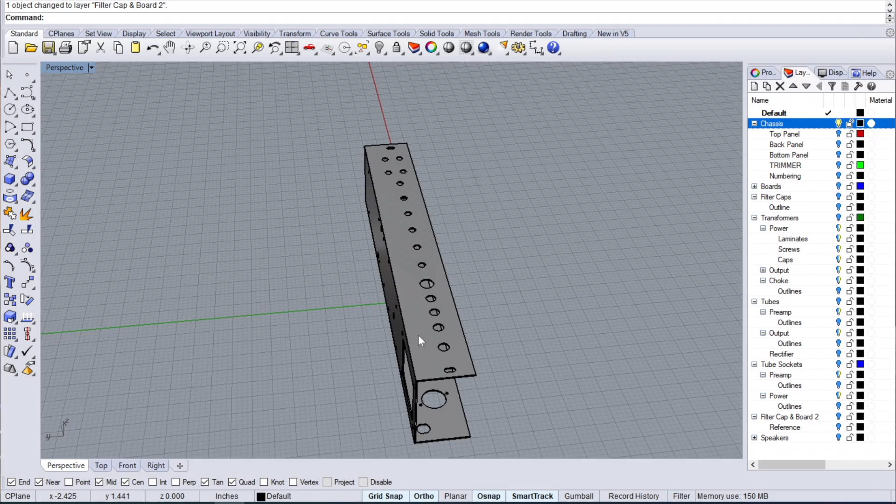I started with the chassis - let's zoom in and take a look. It doesn't have sides on it, but the location of all the holes, fuse holder, inputs, everything, the lamp - that's all accurate. Looking at the back, I've got the opening for the transformer, all the holes, wire holes, mounting holes for the other transformer there. And then all the accurate openings for power cord, rectifier, output tubes, preamp tubes.

Everything is there. I've worked up a little panel with all the numbering two different ways - the traditional way and a reverse way - so that if you're standing at the amplifier and the chassis is in back of the cabinet like it normally is, the numbers would face you. The Blues Juniors at some point finally figured out, hey, let's face the numbers toward the player. That's a good thing - I might try to do that.

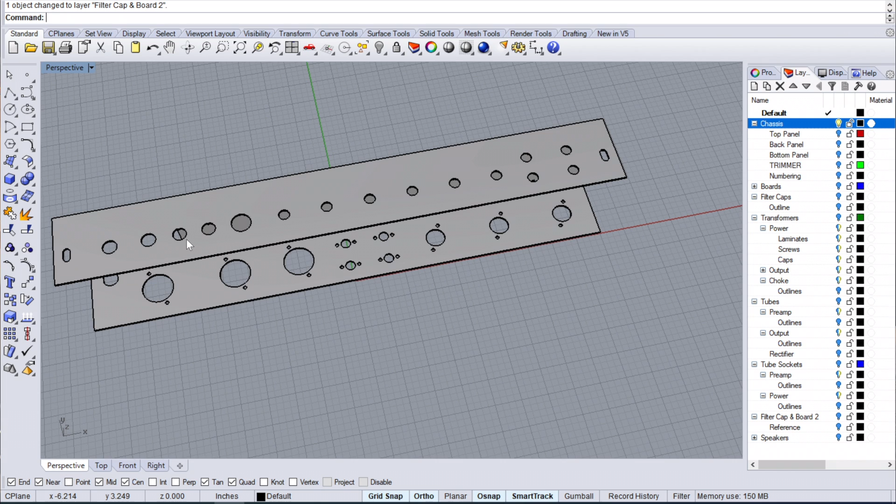I may end up having this chassis in the front of the amp, but in order to do that I had to draw some transformers. So let's take a look at the transformers here.

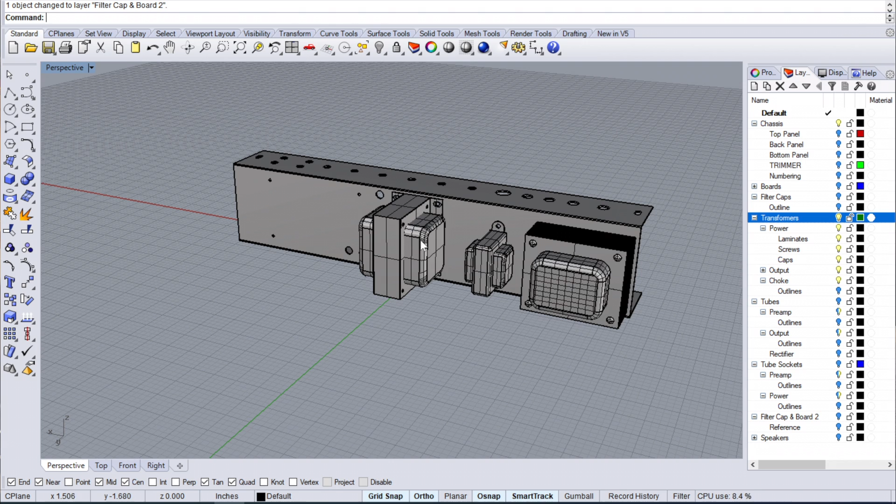So we have on the right side the power transformer, then the choke - I think that's regulating the voltage to the 6L6s, I don't know, it's late - and then the output transformer there.

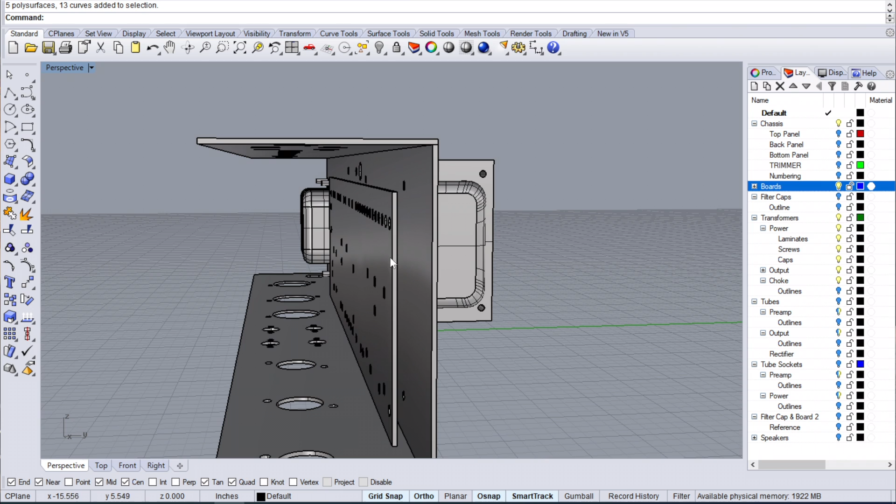I also made it a point to draw the circuit boards - I didn't draw the components on this one, but I'm going to end up having standoffs. I've got to figure out what length of standoff I want. There would also be an insulator board on the underside of this circuit board, so that location can move around.

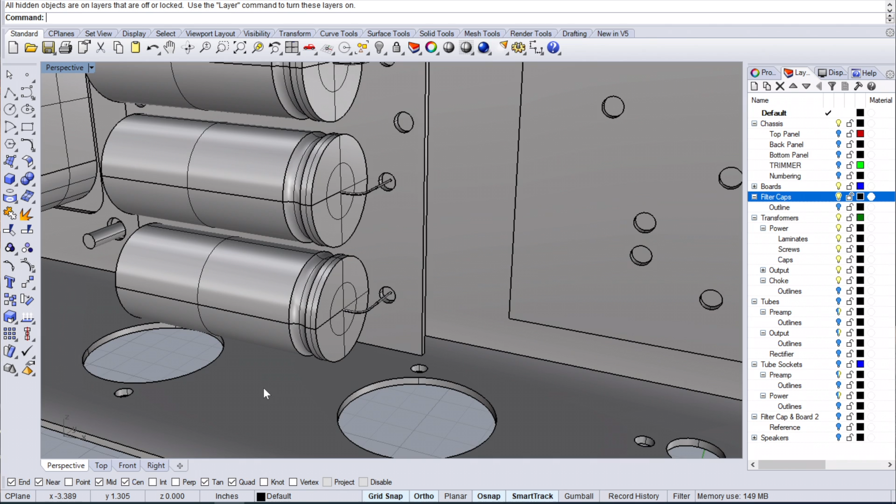Originally I wanted to locate the filter cap board next to this circuit board, so I drew that up and it looked like it fit up and down there. But if you notice, it looks too close to the tube sockets. Anybody experienced with amp designs is probably laughing because of course it doesn't fit, but I wanted to try. When you get the tube sockets in there, obviously that doesn't work.

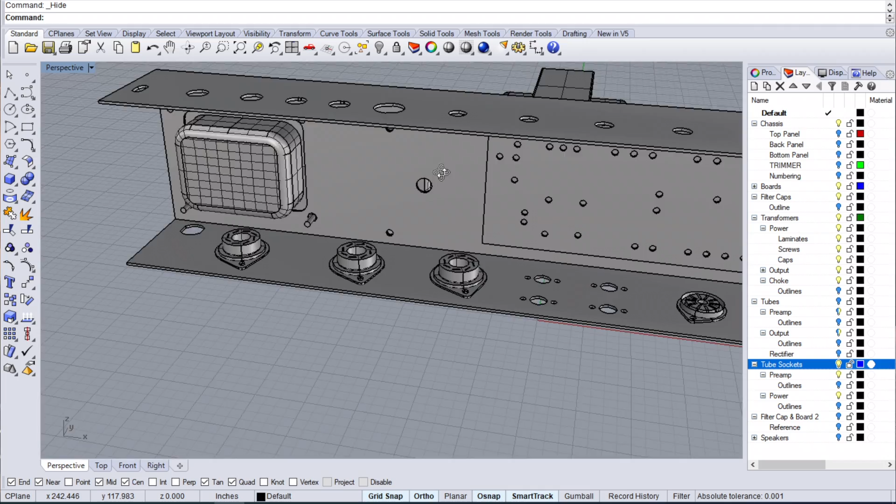So scratch that. You can see the tube sockets here. Along the back side, they have holes for a cap pan cover for the filter caps, because that's about where they go. This will also be on a standoff and have an insulator board underneath it.

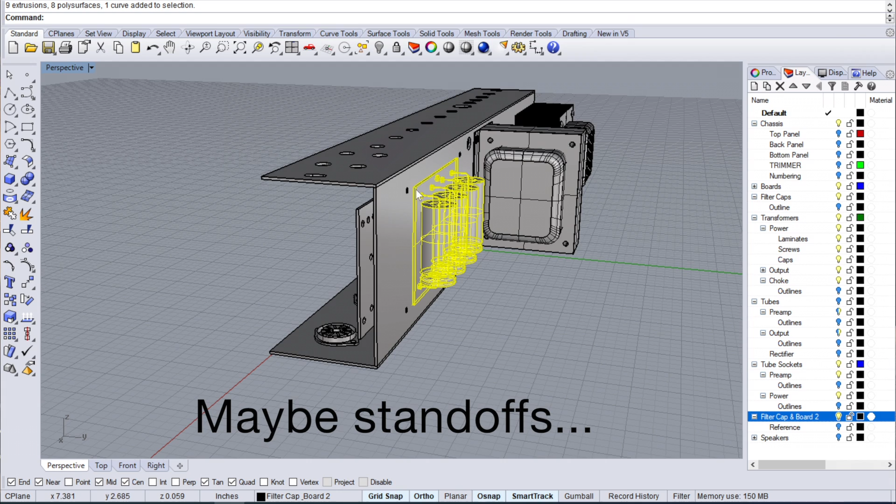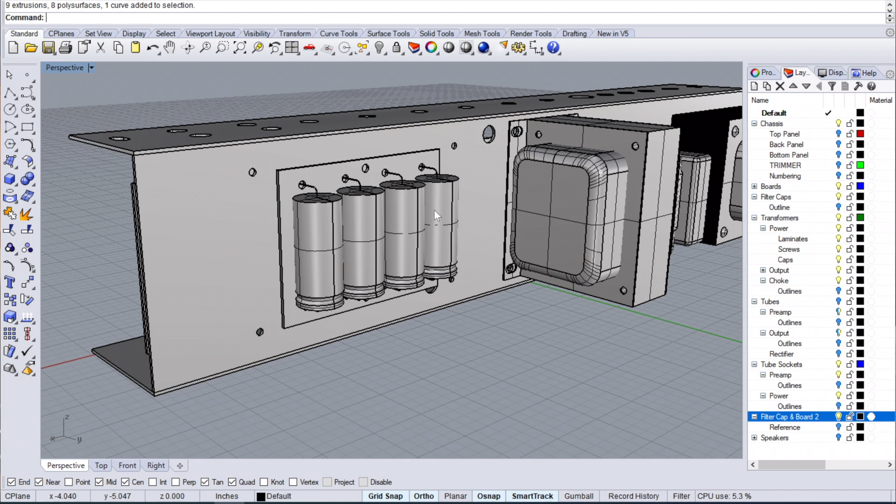But I have to order the filter cap pan. The kit didn't come with it because I'm sure the original amps didn't have it, and that's why they don't include it in the kit. I'm going to order that because I don't want these filter caps just exposed. It's probably really easy to forget they're charged up, and you go to take the chassis out and get a good old zap.

These four holes here, here, here, and here — those are the ones I'm guessing the cap pan mounts to. These two holes in the circuit board are for wires. Everything is drawn to scale.

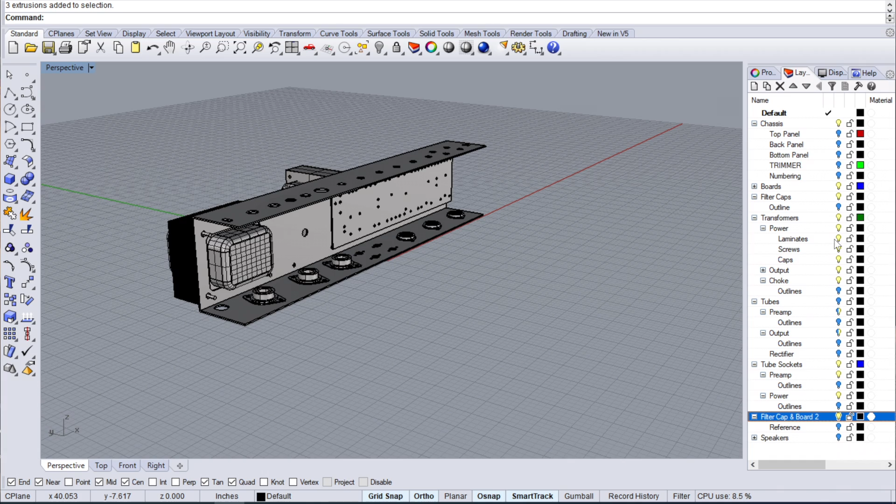In order to figure out the space, I have to have tubes. So now I drew tubes, and I'm not sure if that rectifier is the exact height of a GZ34, but I just used the drawing I did of a 6L6. Basically I have everything I need to figure out how I want to design this cabinet.

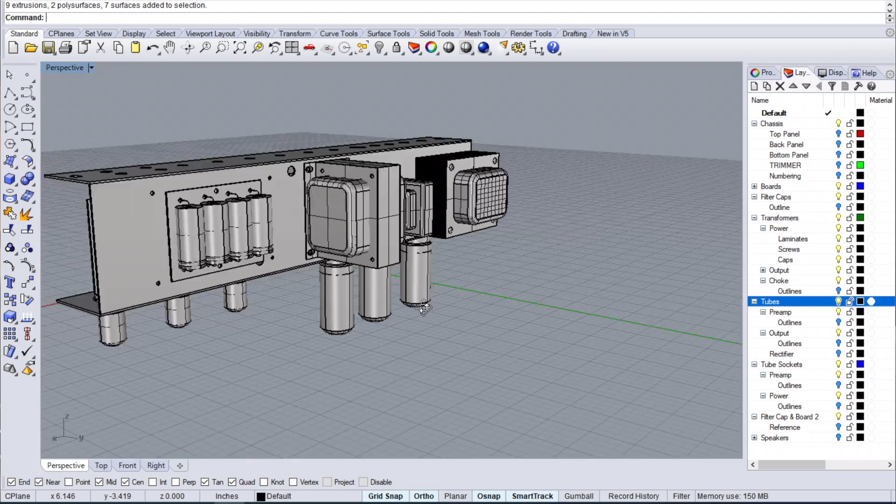I'm pretty excited about it. This is more in-depth than my first three amp builds as far as the mock-up goes, and those all turned out great. This one is over the top as far as the drawing is concerned — more information here than I really needed. But I also needed to brush up on my CAD skills. I'm using Rhino 5 to do this, so I'm pretty happy with it.

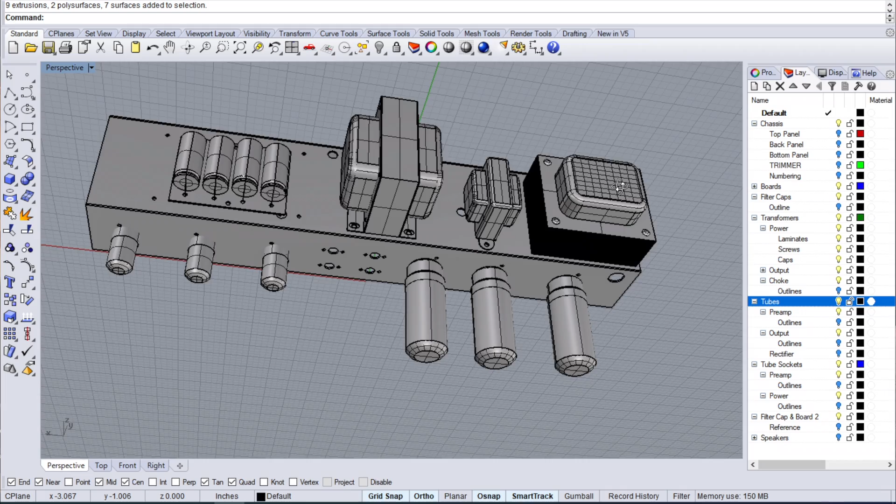It's time to shut it down and quit for the night, and we'll see the next step. I have to draw a 10-inch speaker — I still haven't done that yet. So I've got to draw the 10-inch speaker.

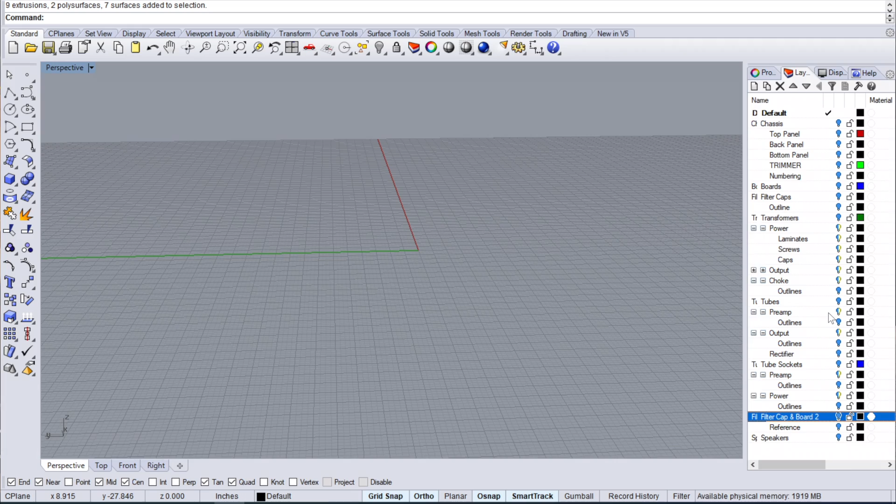Let's just take a look at that 12-inch speaker. Let me turn all these off here. Somewhere in my layers I've got a speaker. This speaker is a 12-inch neodymium speaker by Jensen.

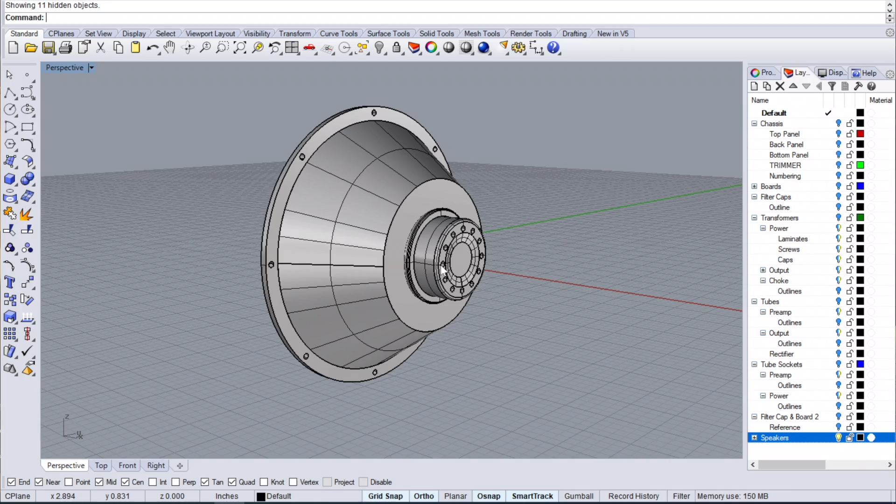Obviously not an exact replica, but what's important is the rim represents the thickness of the basket plus the gasket. It's accurate from the front of the speaker that mounts against the baffle all the way to the back on the magnet. I just went off their drawings, the Jensen spec sheets.

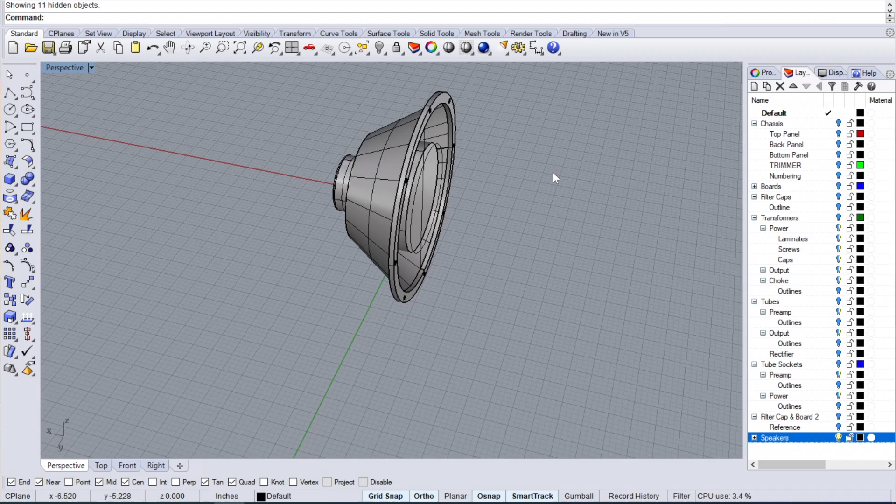So I basically need to draw this, and I was disappointed to find that they don't make a neodymium 10-inch speaker in 4-ohm. They have one, but it's for PAs. So I'm looking at maybe the Jensen Mod series 10-inch — it comes in a 4-ohm. The neodymium 10-inch is an 8-ohm.

So I've got to draw that, and then I'm going to see how compact I can get this cabinet design, how light I can get it, because if the amp is too heavy it's never going to go with me anywhere to a show. I'm done carrying 4x10 combos around — I've got Super Reverbs, I've got Blues DeVilles, and I'm just kind of done with that.

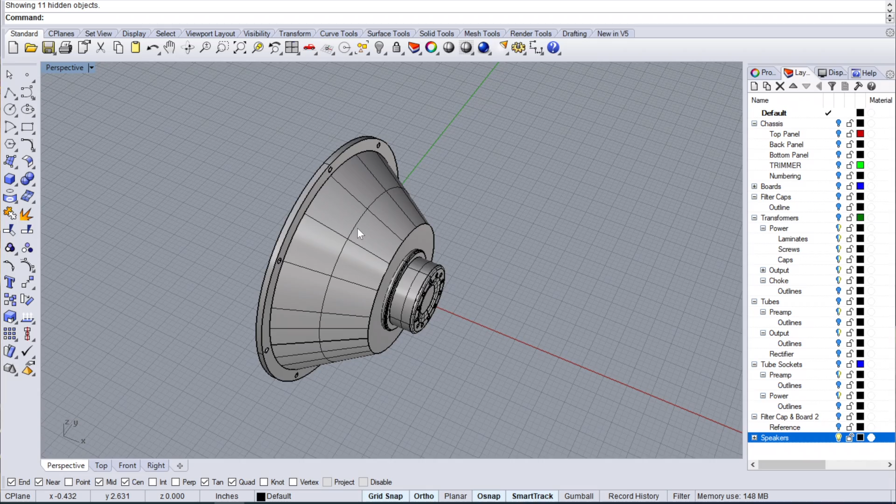My hope is I can get some killer Bassman type vintage tone but have it a little lighter, a little more compact, and it may end up just being a 12-inch. I may not do the 1x10/2x10 combo, but I'd have to get a different output transformer. If I got a different output transformer, I'd have a lot more versatility as far as what I could do with speakers. I could go on about this all night because I'm pretty fired up about it.

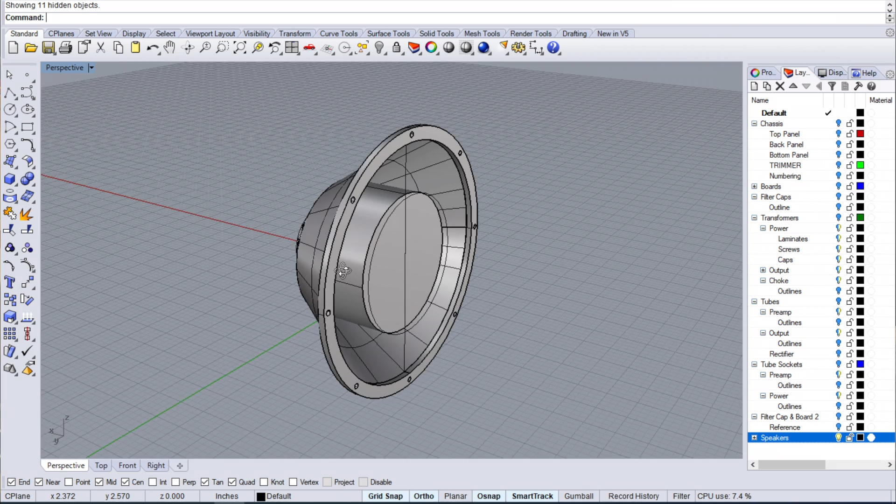It's time to shut it down and on to the next phase, I say.